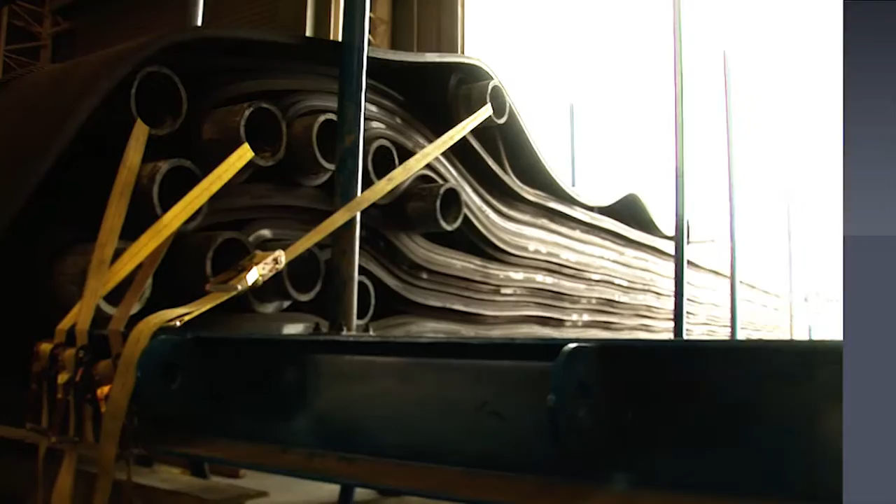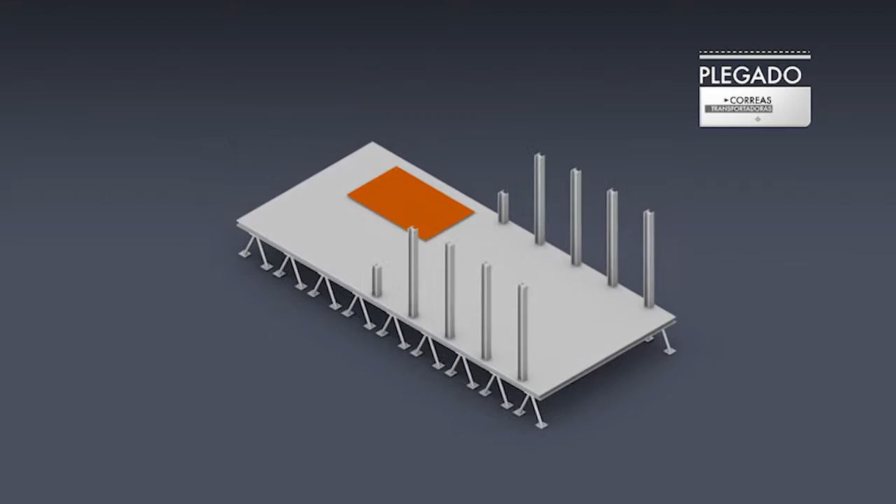Conveyor belt lapping is a process which consists of laying the belt over a platform from one end to the other. When the belt is pulled out of the reel and laid across the platform, 15 meters of belt are folded underneath the farthest end of the platform, leaving the first layer of belt on top.

The second layer of belting is pulled over the first layer, folded and extended over the first layer. This process is repeated numerous times until a specific belt length is reached for the first stack of belting on a specific platform.

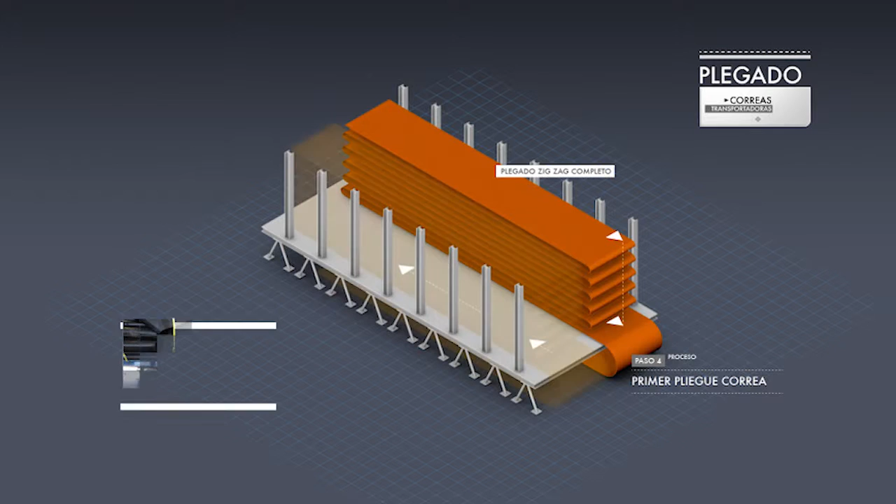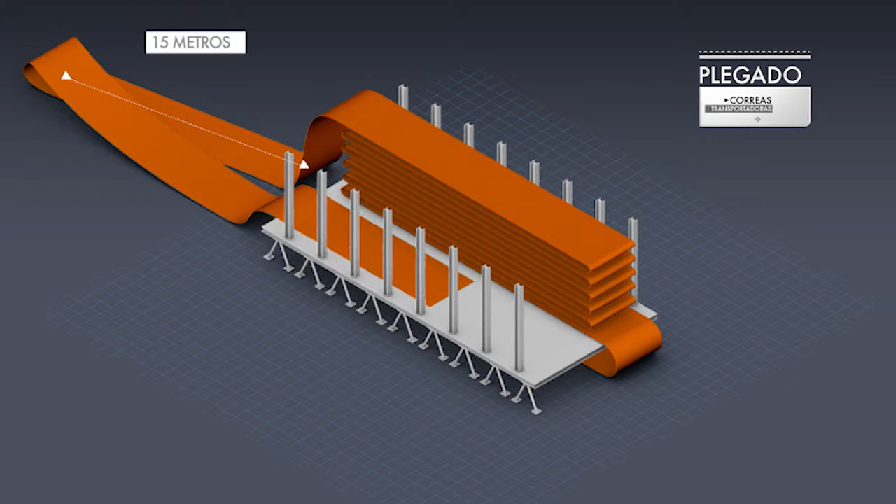Since these platforms are designed for 2 or 3 stacks of belting, depending on the width of the belting, a long tail is left to be folded onto the first stack after the second or third stack is completed. The second and third stack of belting is lapped onto the platform beside the first stack, utilizing the same methodology as the first stack.

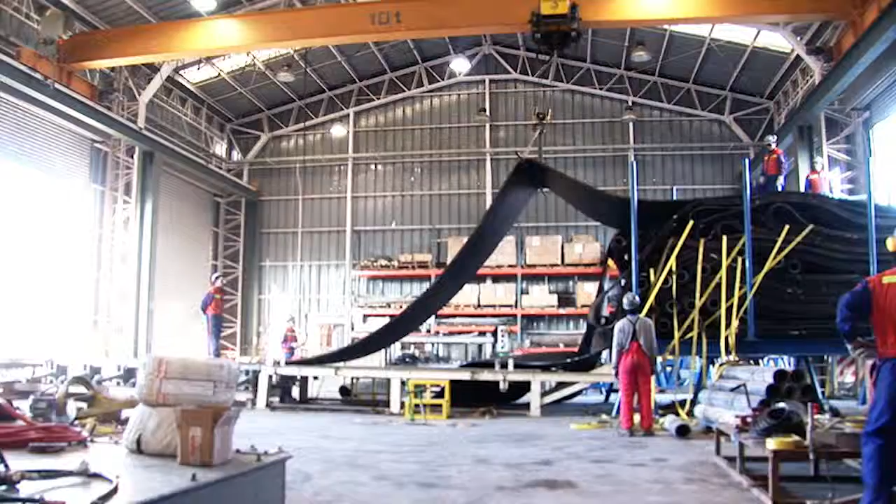Once finished, an extra 15 meters of belt are folded on top of the stack, along with the 15 meters from the first stack. This process is performed by specialized equipment and machinery. We design and build specialized platforms which support the belt length and weight.

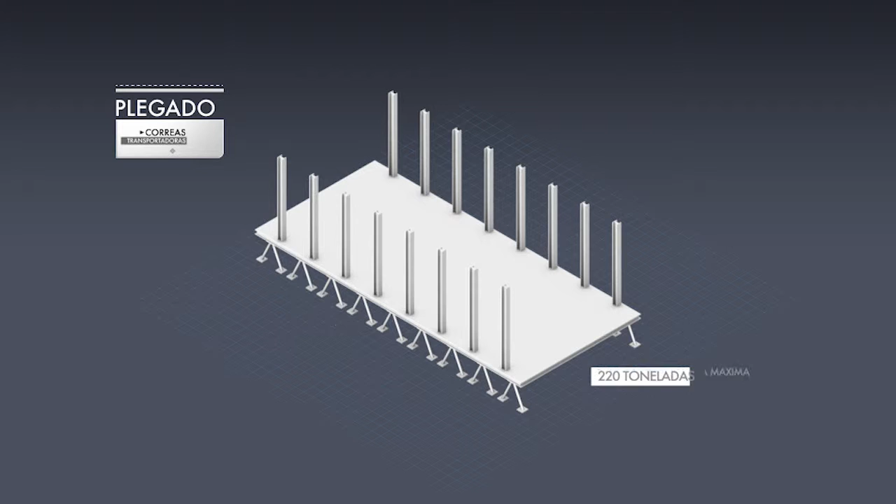These platforms can be up to 18 meters long and 5 meters wide, and they can support up to 220 tons due to legal restrictions on length in Chile. After the second or third stack of belt is completed, the conveyor belt is prepared for transportation.

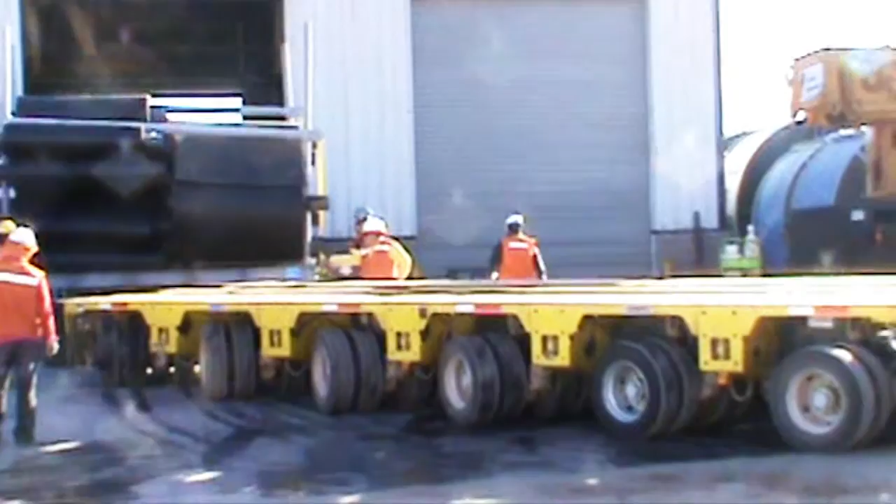To transport these platforms, a specialized low-bed hydraulic tractor and trailer is utilized. The trailer of the truck is then placed underneath the platform in order to lift it up using a hydraulic system, and consequently is ready to be transported to the mine site.

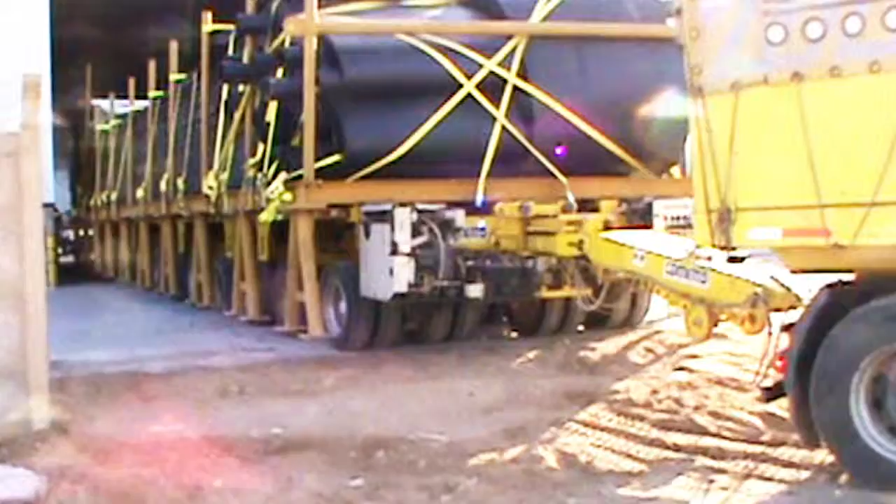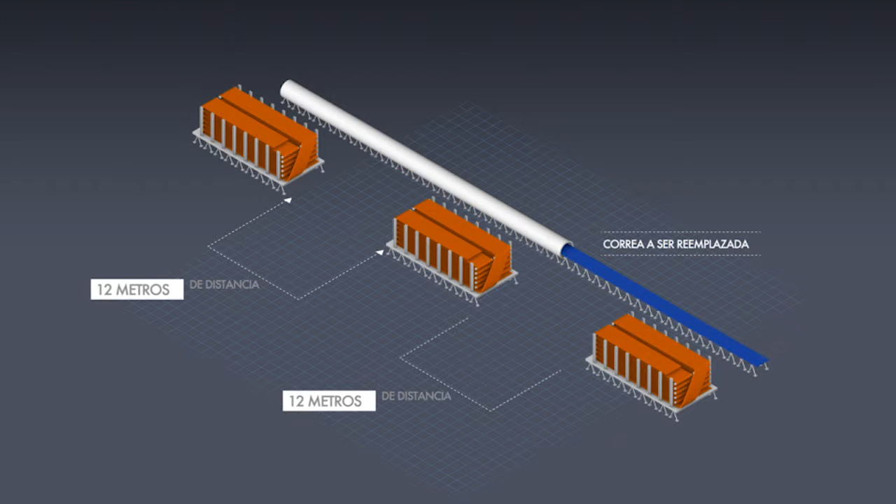Once the platforms arrive on site, they are aligned using GPS technology and topographical coordinates previously established by our engineers. These platforms are aligned beside the belt that has to be replaced, leaving 12 meters distance between each one, allowing the splicing of every lapped belt. This procedure is carefully supervised by our staff of professionals to prevent any kind of incidents or accidents.

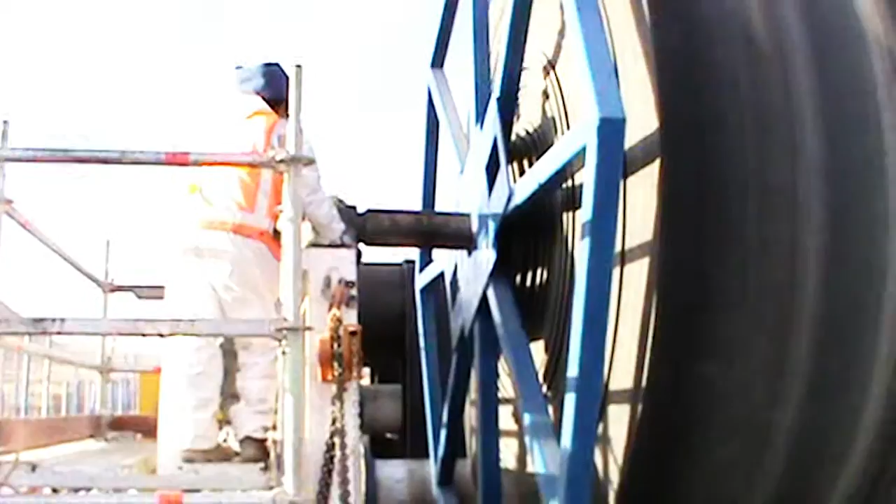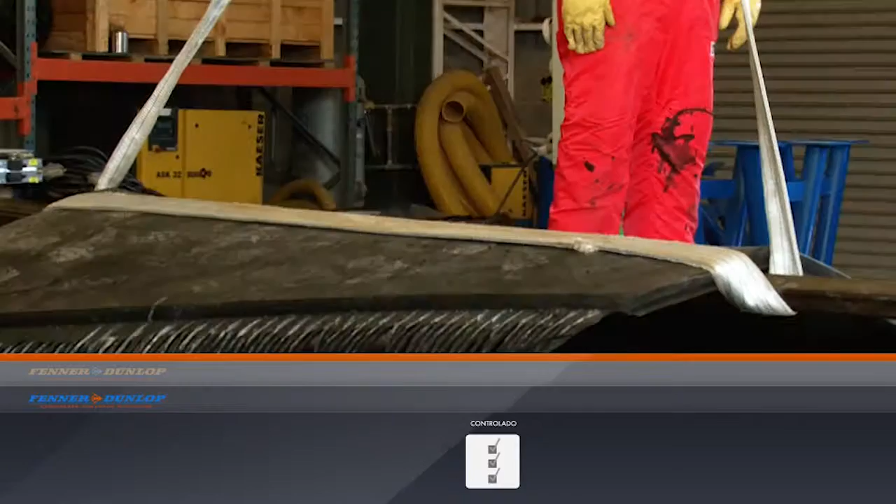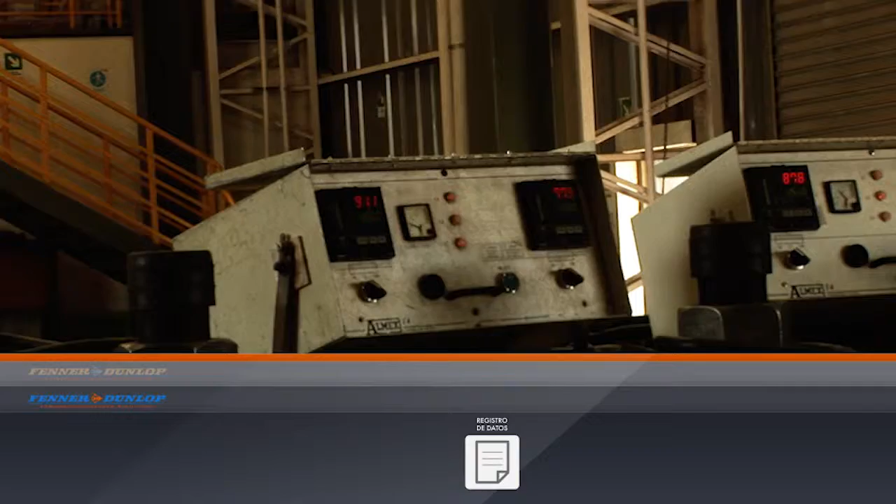The purpose of performing the lapping process at our facilities is to have a controlled environment. Every splice is done under indoor controlled conditions to avoid external factors such as adverse weather, dust, wind, etc. Each splice is carefully monitored and recorded with data loggers to check temperature, pressure, humidity, etc. This process is essential to ensure the quality of the splice.

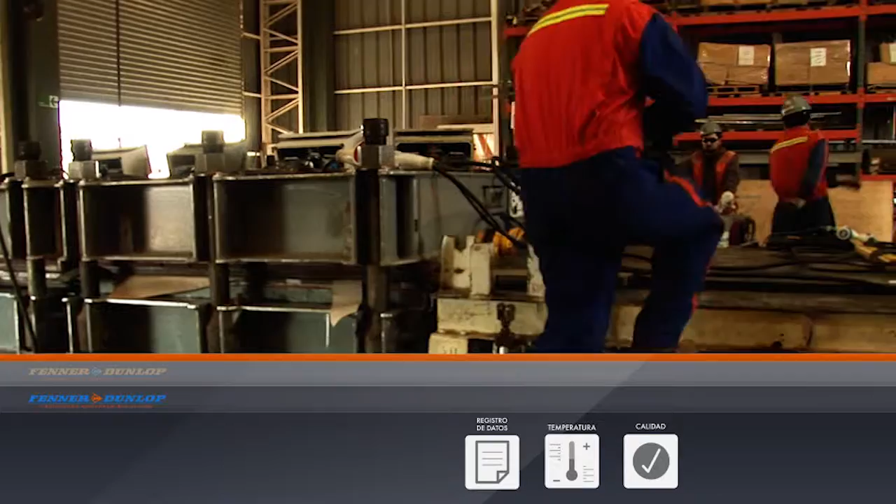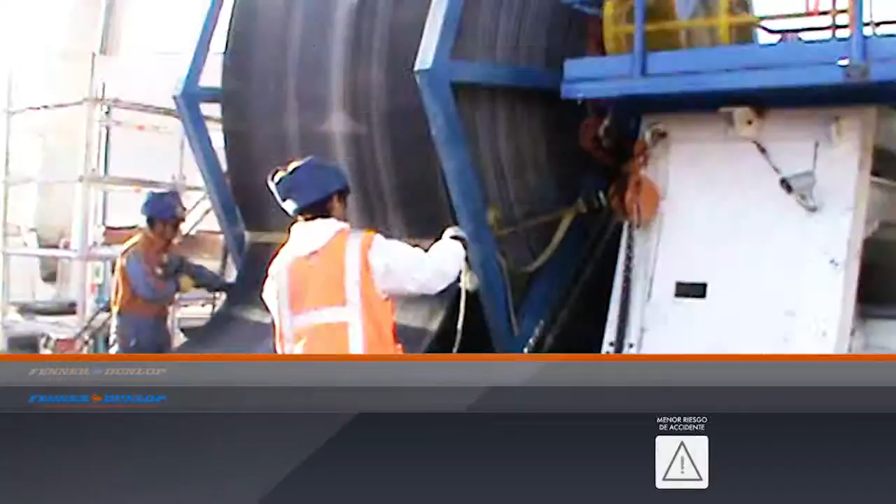Every splice is X-rayed for quality assurance after the vulcanizing process. These X-rays and recorded data are issued to the customer for their records. No workforce on site while splicing and lapping the conveyor belt. Less risk on site for accidents and incidents, which are reduced to a minimum level.

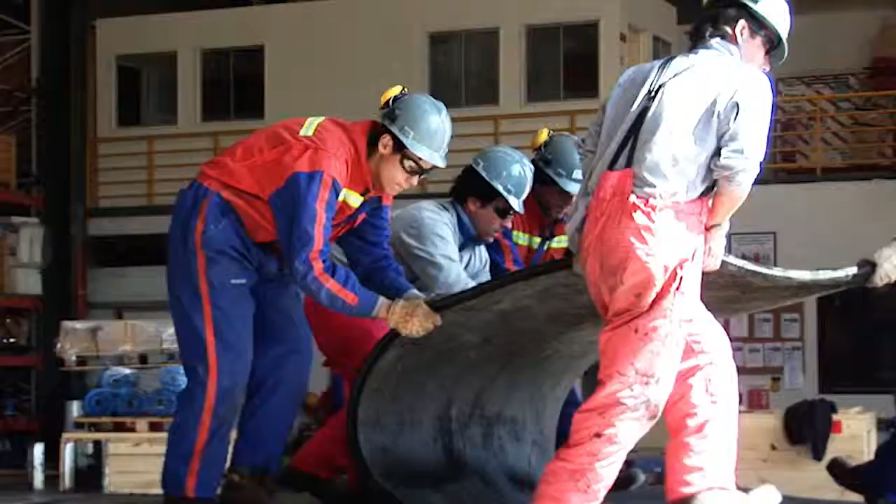No extra equipment on site since the splicing and lapping processes are done off-site. It is unnecessary to transport extra heavy weight equipment, cranes, forklifts, etc. to the mine site. All lapping is accomplished within our shop site with our professional engineers and technicians.

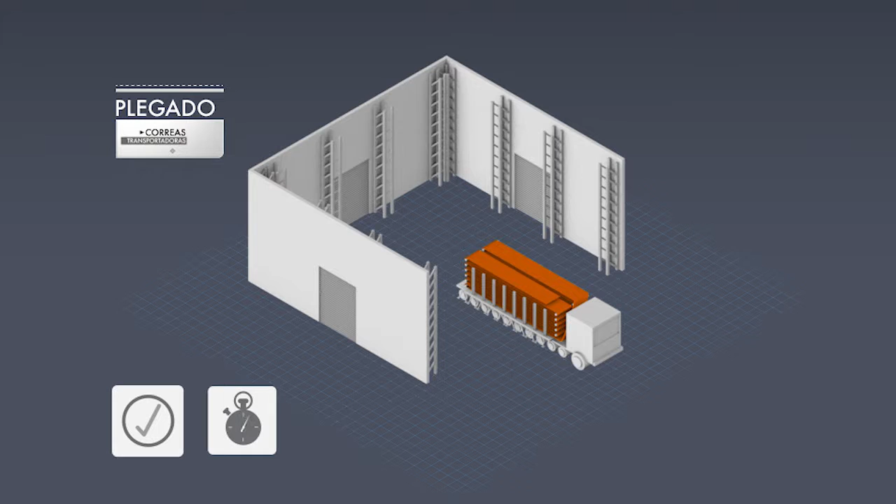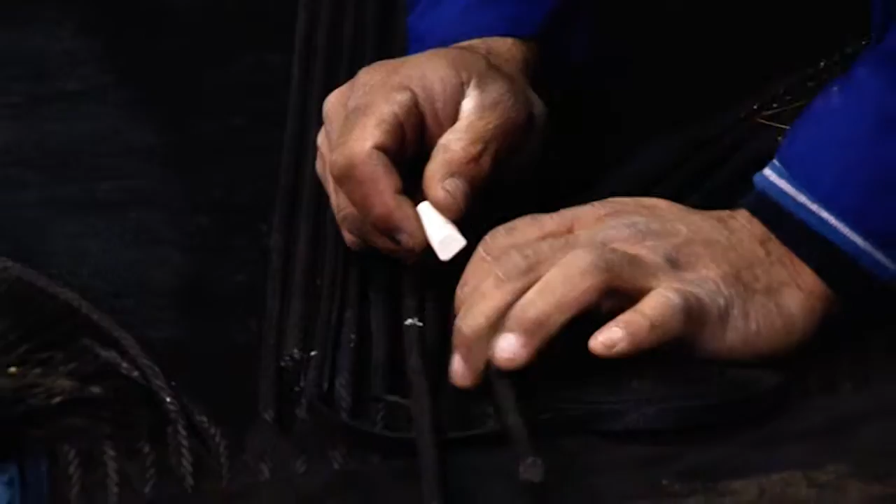The object of performing this work in our shop is to guarantee the best possible process for the customer. This process decreases the downtime of the mine, since all platforms are pre-spliced together off-site while production is continued. The belt can be spliced and lapped prior to the deadline for installation and stored off-site from the mine.